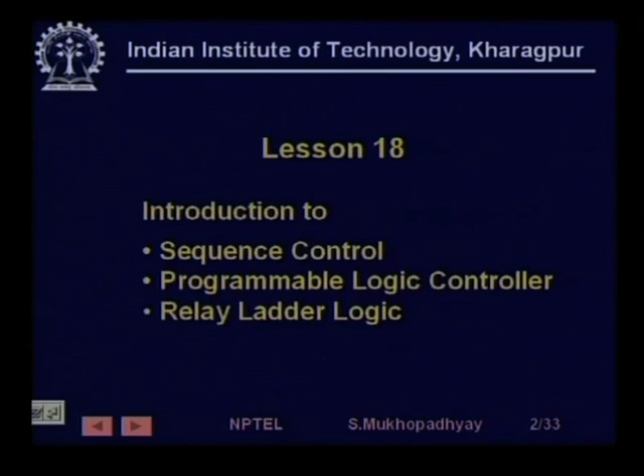Good afternoon. We are going to start lesson 18, which is on a new subject. It is a new module on sequence control. So, we are going to have our first introduction today on sequence control, on the kinds of controllers that are used for sequence control, namely programmable logic controllers or PLCs, and we are going to take a first look at the programming languages, the languages which are used to specify control programs for PLCs.

So, as usual, we will first look at the instructional objectives. So, after learning the lesson, the student should be able to state three differences between analog and sequence control. This is important because traditionally an electrical or manufacturing or chemical engineering student is typically exposed to analog control, while the kind of control that we are considering here is different in nature. So, it is important to understand the differences between analog control and sequence control.

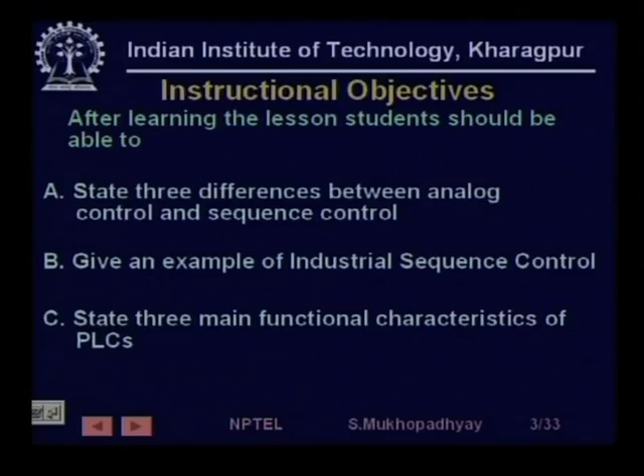Obviously, she should be able to give an example of industrial sequence control, an actual practical example, and for programmable logic controllers, the controllers which are primarily used in the industry to implement sequence control, he should be able to know three of their major functional characteristics. He should also know the major structural components of the PLC, and he should be able to describe a typical program execution cycle that takes place in PLCs and how these program execution cycles affect the control performance.

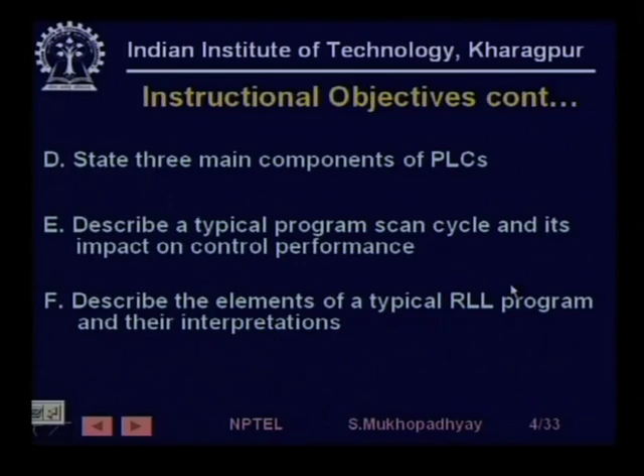And finally, he should be able to know what are the typical elements of a relay ladder logic program, which is one of the programming languages used for programming a PLC, and know the various interpretations of the symbols used in this language.

So, first of all, let us try to understand what is sequence or logic control. As I said, it is maybe very significantly different from analog control on various aspects. So, we need to understand what it is. This is my definition, words are mine. It is a class of control problems for systems where inputs, outputs and feedbacks are discrete set valued. Actually, I would rather say that, for the purpose of control, it is taken that they are set valued, that is, the intermediate values are not considered.

So, for example, a switch stays 99.999% of the time in on state or off state, but obviously it goes from the on state to the off state, and that timing is so short that we choose to ignore it. So, we say that a switch is a system which stays in either one of two states, either on or off. We ignore the times when it is going from on to off, because it is too small and of no consequence for us.

So, in that sense, the inputs, outputs and feedbacks are discrete set valued like on off, and the problem is to cause or prevent occurrences of either particular values of outputs or combinations of outputs. So, when switch 1 is off, switch 2 should not be on. Let us take a daily life example of a railway crossing. If the incoming train sensor is on, then the gate should be off. So, some particular combinations are allowed and some could be prohibited.

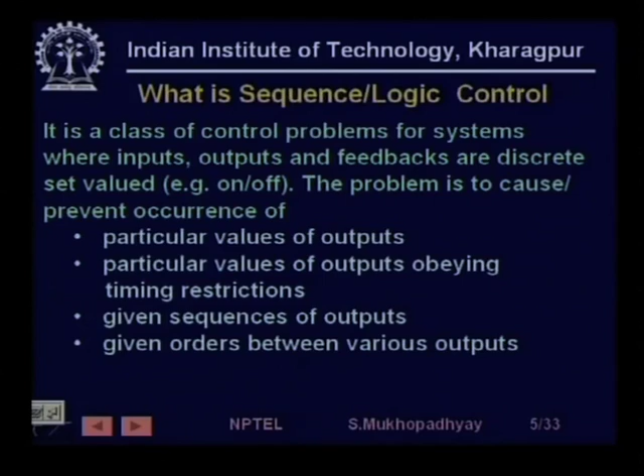So, only some particular sequences of outputs or events should be allowed, or there could be some given orders between various outputs. So, after this occurs, that must occur. So, these are sequencing orders, sometimes also called interlocks. If this has already occurred, that cannot occur.

So basically what we are trying to say is that if the system states are assumed to be discrete, this kind of statements are made about the desired behavior of the system, and then the problem of control is to realize them by exercising the inputs to the process. So, this is typically a sequence or logic control problem.

Why are they called sequence or logic control? Because it is a finite state thing. So, it is described more by logical methods than by numerical methods. Before we look at them in more conceptual ways, let us take an example. So, look at this. What is it? It is supposed to be a die. It's supposed to be a stamping press. So, if you look at this, then

so this is the stamp. This is the press. Okay. So, there are two solenoids, up solenoid and down solenoid. So, if the up solenoid is energized, these are hydraulic presses. So, if the up solenoid is energized, then the pressurized fluid flows through this path and goes into the machine. So, the machine is constructed in such a manner that then this press goes up.

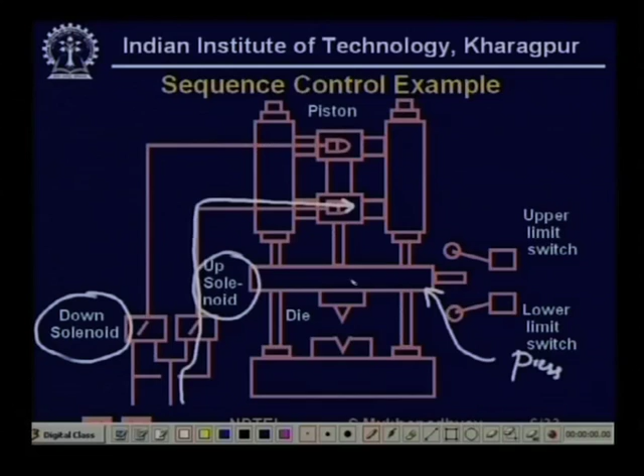Similarly, if the down solenoid is energized, then this press goes down, and this is your metal sheet. It comes down and stamps on it. So, it keeps stamping, retracting, and creating a particular shape of sheet metal. These things are typically used in making, let us say, car bodies, right. So, it is a hydraulic stamp press. Okay.

So, what happens is that after it goes up, the up solenoid may be de-energized. So, whether it has reached the topmost position or the downmost position, this needs to be sensed. So, there are two sensors. This is the upper limit switch and lower limit switch, and these are the two actuators. The down solenoid and the up solenoid are the actuators, and this thing is our system.

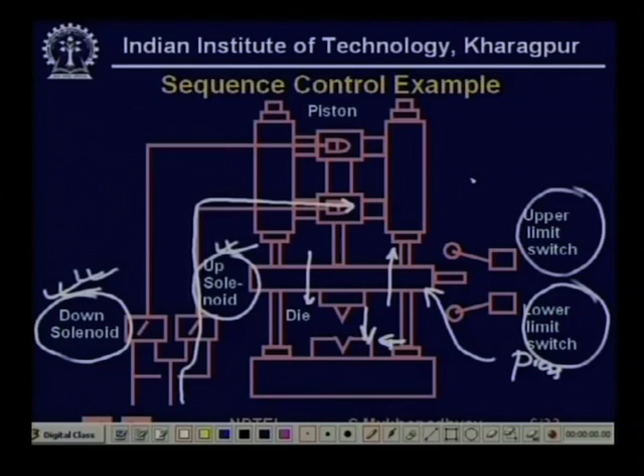So, this is a typical example of a sequence control problem. See, everything is analog if you look fine enough. So, obviously the system cannot instantaneously come down from the up to the down state. But what we mean is that for the sequence control of this system, we are not interested to know the intermediate states.

We want to only ensure that if this machine is supposed to stamp, if that command is given, then it should periodically come down and then go up, come down and go up. So, our control problem is only to ensure that it periodically goes through the up down, up down, up down sequence, that is all. So, in this sense it is a sequence control problem, right.

So, there are n number of such other problems, many other application examples. For example, a plant startup shutdown sequence. So, when a plant is started up, initially you have to bring up levels to start. Initially automatic control may not be immediately applied. So, first you have to maybe fill some chamber, then start the pump.

So, first open the valve, then you start the pump, then once the level starts filling, you see when it has reached some sufficient level, then you switch off the pump, then you switch off the valve. And then you start the heater. So, let the temperature come up, then maybe the automatic control will start.

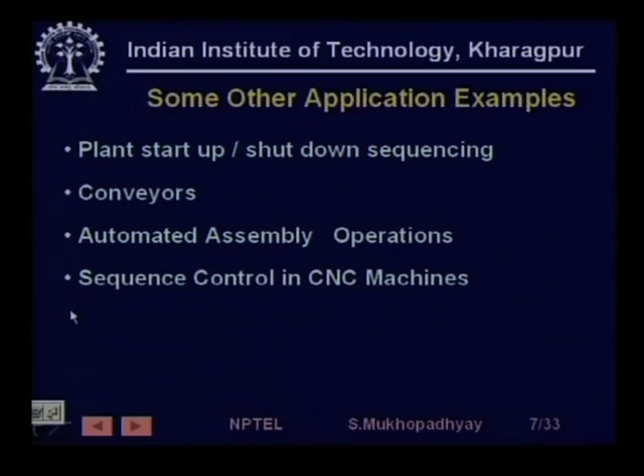Similarly, sequence control in CNC machines, where depending on the geometry of the part to be cut, depending on the machine configuration, sometimes you have to move the bed this way, sometimes that way, sometimes you have to retract the spindle up, you may have to change the tool, you may have to switch on some lubricant flow. So, various kinds of supervisory control actions must be specified.

In fact, if you see CNC machine controls, you can very clearly see that there are two different control systems, usually on two different control processors. You generally have a high speed microprocessor or a DSP which takes care of the analog control problem, which is much faster, and actually controls the various motors. And you have a PLC, generally GE Fanuc or some make of PLC, which will basically control these various motions and maybe also monitor the machine.

So, supervisory control of robots, as I have told. That is why PLCs are used hugely; this kind of discrete event control problems are very common in industrial processes, and you will find literally hundreds of them.

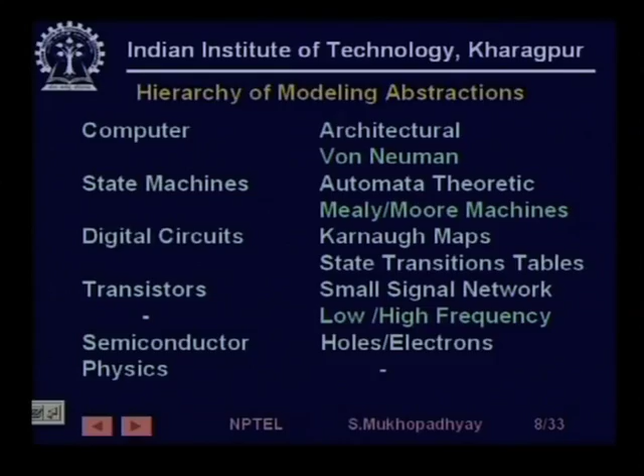But you obviously will not describe a state machine as a set of transistors. So, there is a whole hierarchy of abstractions. As you go up and up, you consider more and more things, and you consider them in more and more abstracted ways. But sometimes it also happens that the same device is being looked at as one thing by one person and as another thing by another person. For example,

if you are the user of a digital circuit, then you will use a model like a NAND gate or AND gate or flip flop. So, you use one kind of model, but imagine the gate designer, the VLSI designer of the gate. Why you look at a gate not as transistors but as a digital circuit is because you know that, just like the switch example I gave, for most of the time it will either stay in a 5 volt state or a 0 volt state. So, it is either 0 or 1.

So, it suffices to describe when it will go to 0 and when it will go to 1. It is not important at all to describe how exactly the voltage signal will rise from 0 to 1. On the other hand, the VLSI designer wants to design the gate. The gate circuit will automatically go from 0 to 1 or 1 to 0, but the whole credit of design goes into understanding how fast you can make it rise, how much less power can be dissipated and things like that.

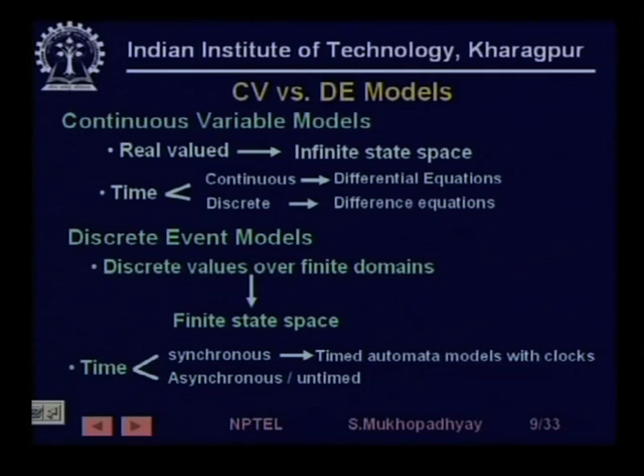So, discrete values over finite domains, and therefore, we have what is known as the finite state space. So, the combinations of variables that can exist in a system are going to be finite. Similarly, for time, we have two kinds of models; we are not going to see this too much, but we have two kinds of models called synchronous and asynchronous, where we assume that all variable changes occur along with some clocks, just like a master slave flip flop is a synchronous device.

Or sometimes we have asynchronous. So, at any time certain variables can change. So, it is like time discretization here. If variables can change from one value to another value at any point of time, we call it asynchronous. If it only happens at certain periods of clock ticks, we call it synchronous. So, once we create this kind of discrete finite state description of the system, then we can construct the behavior of the system.

So, typically we have in such systems three kinds of variables. They are the input variables. Input variables are some things which are applied externally. Okay. Then there are output variables, and then there are state variables. So, output variables are something which we can maybe sense or see, and there may be some other variables which we cannot see, but the system goes through them. Okay. So, in most industrial control problems we have only a finite number of system states.

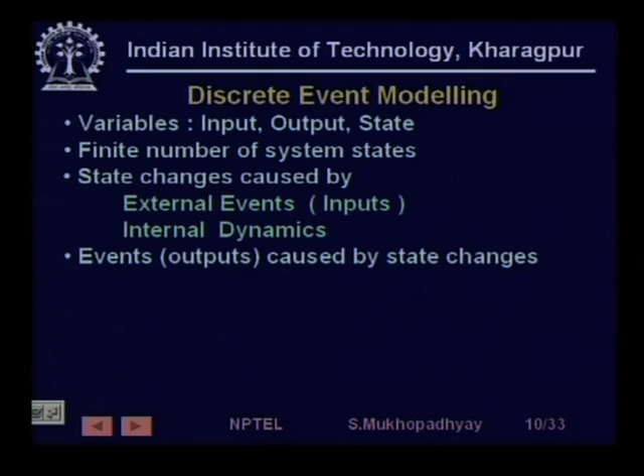Similarly, at every state there are some outputs which are exerted by the system. So, as the system goes from one state to another, the outputs are also changed, and these output changes are perceived in the external world, and they are sometimes called events, right. So, you could have events or outputs caused by state changes.

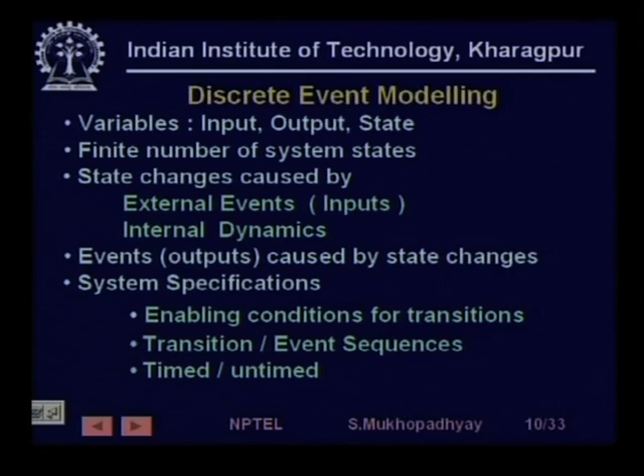So, when we have to describe a system, we'll presently see an example. Whenever we want to model a system for the purpose of logic or sequence control, we have to find out which are the variables, which are the input variables, which are the output variables, how those change, what input exertion causes what state change. So, basically if we can describe these, then we have got the system model.